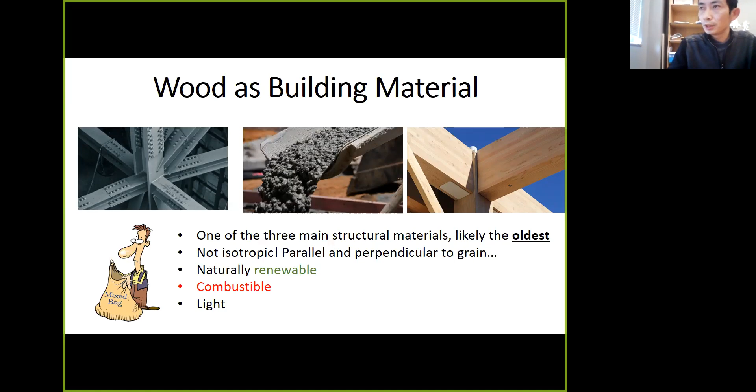As of now, at least in North America and most developed countries, wood is very popular in low-rise and residential applications. If you want to build with wood, there are basically 3 options. One is really old-school, like log cabins. Of course, that's not that old—the really old things you can find in some old civilizations like Chinese and Japanese civilizations.

Then, not quite at the turn of the century but during the middle of the last century—1960s, 1970s-ish—in North America we figured out a way to mass produce, industrialize, and standardize wood products as small 2x4s and wood panels. That gives rise to what we see every day now: stick framing. It's maybe 90% of the residential market here.

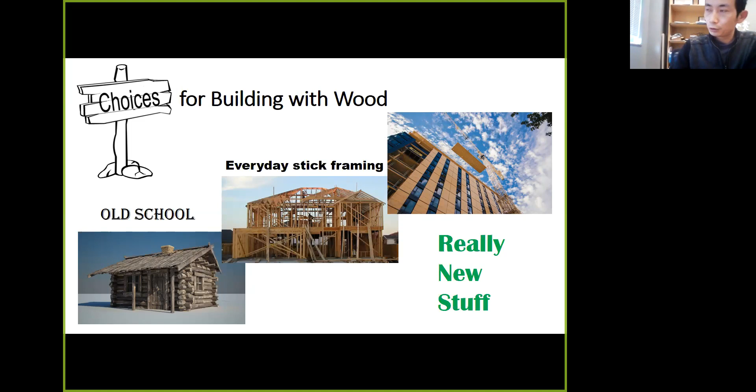And now it's trickling down into North America, including Canada and the United States.

If you start very old, we can actually learn something from it. Some people feel like wood buildings can't last very long, or you have to paint them every year or every couple of years. I know I have to do that for my house, but some of the amazing things about wood design is that wood itself is actually pretty resilient against environmental attack. Like this Japanese temple, it's more than 1,000 years old, and back then there were no chemical preservatives, no paints. I don't think they painted them.

And if you think about tall wood, that's actually not really new. You see this tower, almost 1,000 years old, in China. It's equivalent to an 18-story building nowadays. So that's tall wood, right?

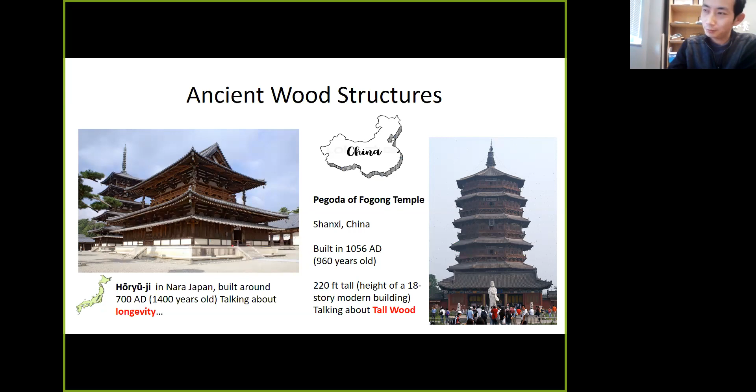But then the question comes naturally: if tall wood and those resilient wood buildings are so great, why don't we do it? I think at least for North America, the US and Canada, everything's driven by the market. Those old magnificent wood buildings were mostly for religious purposes, or they're palaces, like the Forbidden City. Average homes, you don't have resources to build those types of things. So we are thinking...

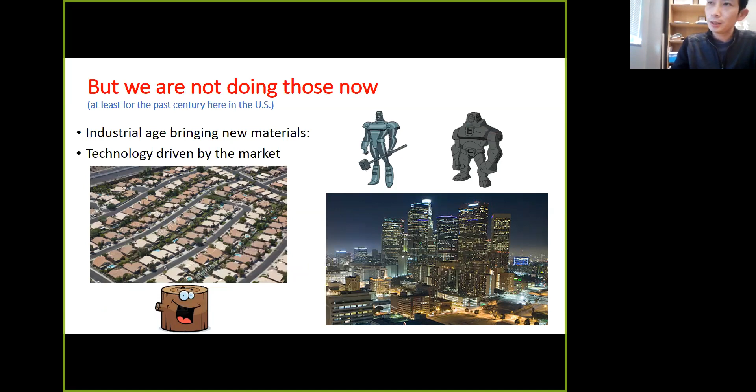At the turn of the century, when industrialization came through, what's the pathway for the wood industry? The wood industry basically said, you know what, we're happy with just handling the residential sector, low rise. We've got a huge market, so we're happy with it. We'll leave the tall buildings in the cities to concrete and steel. That's what they did. So this market drives the technology.

And then we have light frame wood construction, where you can just have some human labor to handle everything. You don't need a crane to do those types of things. Nowadays you probably need some lightweight crane to do the wood trusses, but that's pretty much it, like one day on the job site. The rest of it, you end up using small wood pieces and lumber, and you can handle them with a 5 or 6 person crew, and frame up a single family home, or frame up a residential home up to maybe 5 or 6 stories. That's the current IBC limit.

In current construction of those stick-built or 2x4 homes, you don't really see that much glulam composite lumber. Maybe you see them when you want a really open space and a big span. You maybe use them, but those are just too expensive for single family homes.

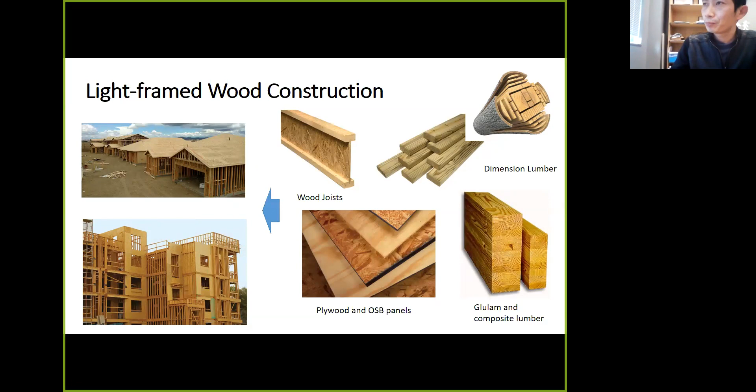The light frame construction has its strengths and weaknesses. One of the most apparent strengths is why nobody can beat light frame wood in the low-rise residential sector: low cost. I think there's a study that shows to frame up a 2-story house, if you take the steel or concrete option, at least in the US, the market price is at least 2 times more expensive than light frame wood. So there's no other option.

It is lightweight, which is good, and we see that during an earthquake, like the Northridge earthquake, wood buildings get damaged, but they don't collapse that easily. It's not a life safety issue, and there's really architectural flexibility. You can frame up a $1 million mansion with wood. You can also do a trailer home with wood.

So it's kind of targeted for the residential market, but there are a lot of shortcomings. The first one, which in my personal opinion is probably one of the most difficult to tackle, is human error. You think about a light frame wood home, you have to literally do it on site and nail in maybe 1 million nails with nail guns, but they miss a lot, and there's no good way to systematically check it.

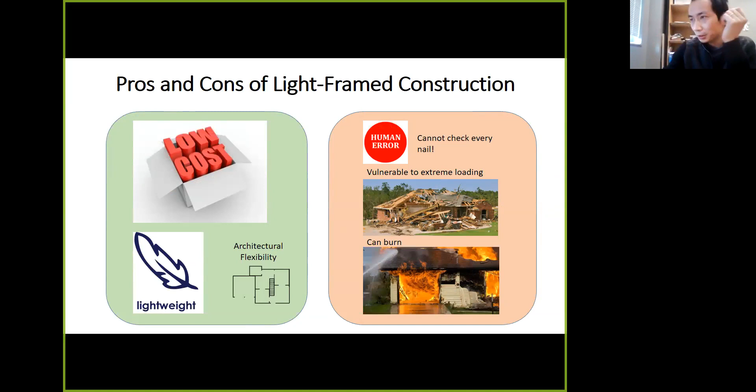And finally, because you have small wood pieces, it can easily burn, and once it burns, it's hard to fight. Because of that, we have limitations in the building code. Per IBC, it is really not economically viable to do type 1 construction using wood. Type 1, for those not familiar, typically means you can build as high as you want. But for light frame wood, it's extremely hard to do because they burn.

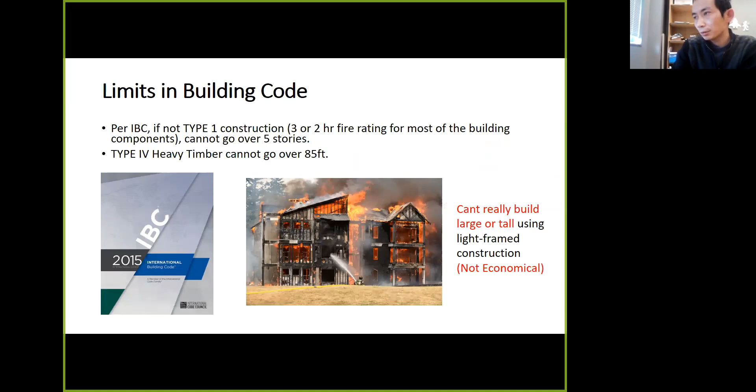Currently, if you say just the wood, how high can it go, it's a Type 4 heavy timber, 85 feet. So because of fire, we're pretty much stuck there. And also, I mentioned it is safe, but it is not really resilient. It's a ton of damage.

Like this house you see, that's actually a picture from the Northridge earthquake. This is a code-compliant design because building code prevents buildings from collapse. It ensures minimal life safety, so you can get out of your home alive. But when you return, if you don't have earthquake insurance, it's gonna break your back.

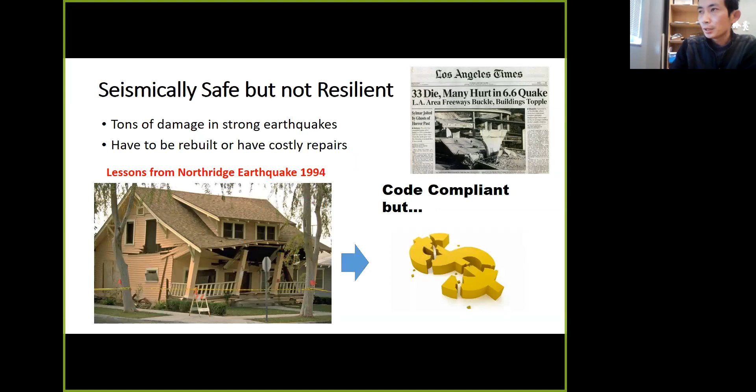So those stick frame buildings started being built in the 70s, up until the 1994 Northridge earthquake. Before that, people just built them. We have a separate building code for wood, called IRC, International Residential Code. It's coming out of ICC, so it's by the same publisher as IBC. Basically, that one is the prescriptive code.

They don't do any calculations on wood buildings. They basically say if you do it this way, then you can build it, it's per code. Then came the Northridge earthquake, and people realized that the performance was not that good.

So the first major systematic project in North American light frame wood is the CUREE Caltech wood frame project. This lasted quite a while and gathered data on existing wood performance. Then we pushed on to using that data to see what's the best we can do.

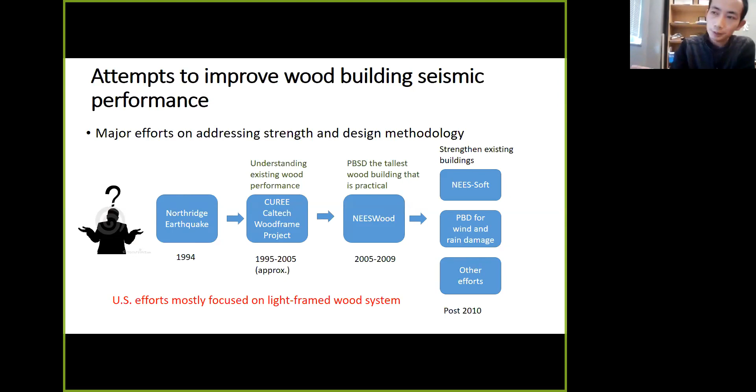If we incorporate performance-based seismic design - that's the NEESWood project, funded by the National Science Foundation from 2005 to 2009. After that, there were a couple of other research projects on light frame stick-built wood, like a study on wind and rain damage due to hurricanes, and some other efforts. But everything up to 2010 is focused on the light frame wood system.

So I'm gonna run through each of them. The CUREE Caltech wood project is a good project, like I said, the first systematic effort. It's almost 20 years ago. If you're new to wood research and want to find the root of why people are doing things on light frame wood the way they do today, that's a good place to start.

It is funded by FEMA and done by a consortium of California universities. Some of the players are very active, like Andre Filiatrault and Kelly Cobeen. People probably know them if you're in wood.

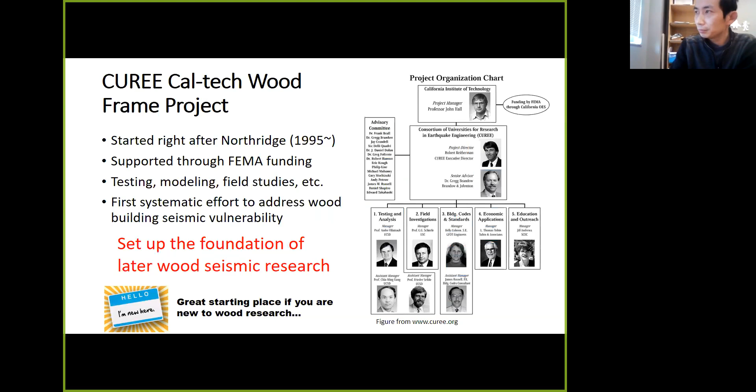The outcome of that is it's the first time people actually systematically tested a wood frame system. They go from connections through assembly - the wood shear wall - all the way through shake table tests for buildings, I think 2-story or 3. I don't remember, but if you check the website out, they have all the reports available. After 20 years, it's still a very interesting read.

There is a simplified numerical model framework that was proposed because, unlike steel and concrete structures where you have clearly defined beams and columns and can do finite elements with beam and column elements, for a wood shear wall there's studs, sheathing, so many nails - how could you do it? So there's a simplified framework proposed primarily by Andre Filiatrault and Bryan Folz in Canada.

So there are 2 computer programs - if you still have DOS, you know, they run on DOS. There's a CASHEW that will let you model a wall using connection data, and SAWS using wall data to model a building. They also found out the non-structural finishing material really matters - it actually contributes about 30 to 40% of stiffness and strength in a wood building, among other things.

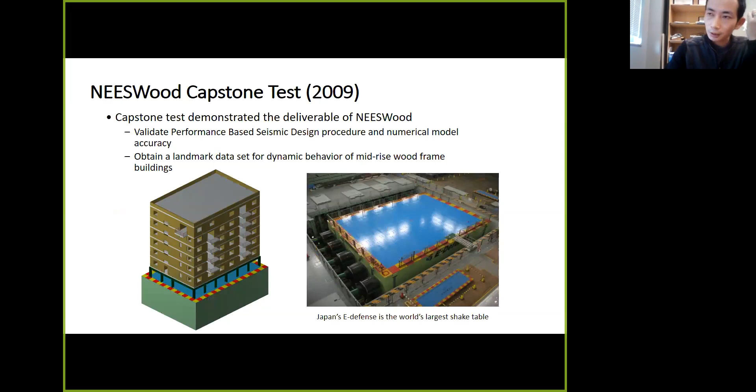This is the test structure. Up to this point, it's still the largest building ever tested on a shake table. That's apparent because the Japanese shake table is the world's largest, and they haven't tested anything bigger than this yet. The design was done through DDD, which is direct displacement design.

The first story steel moment frame has bracing in it. The bracings are there because we need to use that steel moment frame as a 3D truss to lift the building, as I'll show you later. But during the test, those braces are loosened so they don't engage.

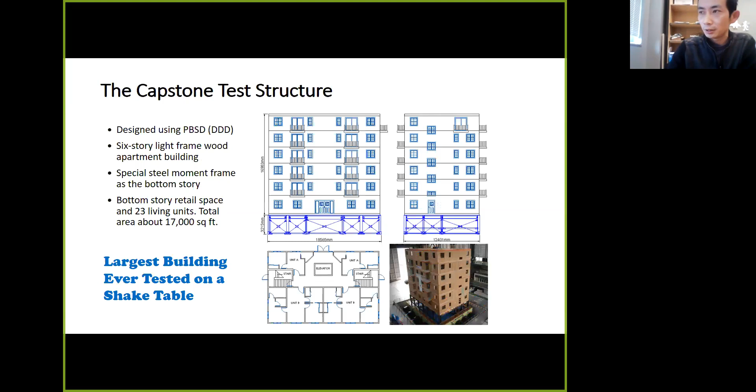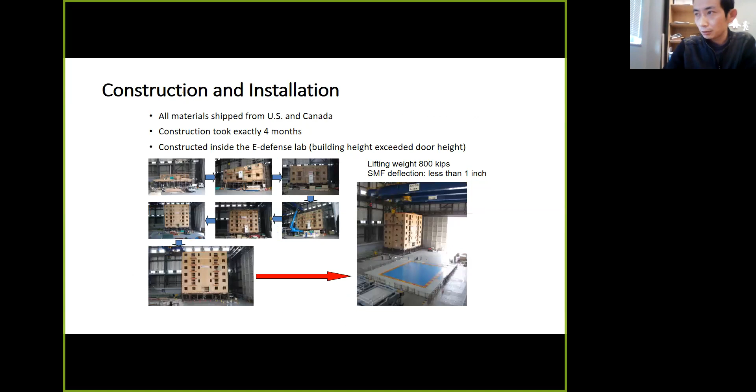Construction of the building takes about 4 months, and we don't have enough funding to occupy the table for 4 months. So the way to do it is to build it in the corner of the lab, and after it's all done, use 2 overhead cranes to lift the entire building and put it onto the table.

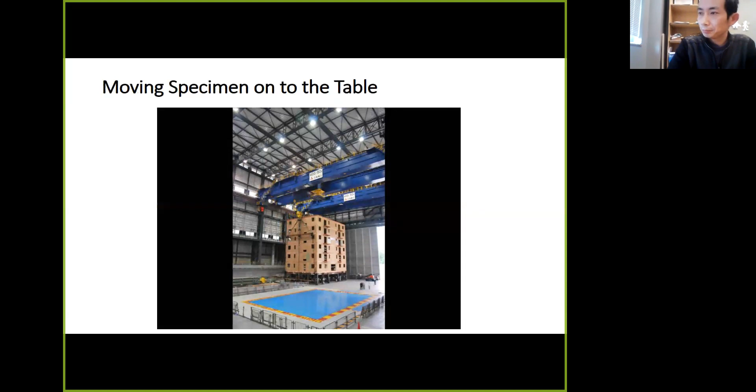Here's the moving footage, time lapse. If you've been following wood frame research, I'll be surprised if you haven't seen this one, but it's still quite a thing. You can see the people actually standing on the side to balance the building.

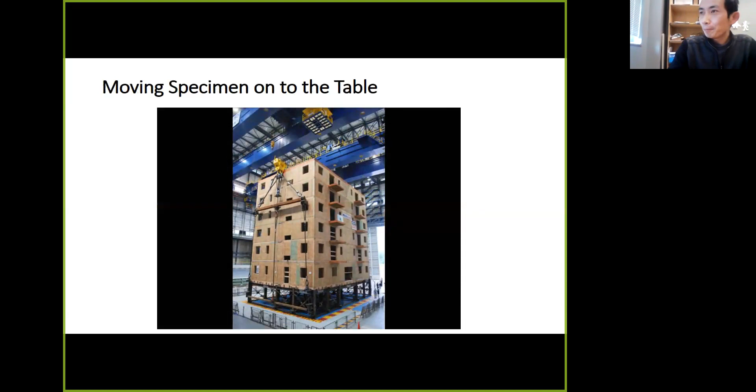After the building was put on the table, they added instrumentation. There's specific instrumentation they use at E-Defense because it's an indoor facility where they can do optical tracking. You see all the red LED lights, and they have high-speed cameras to track the movement. This turned out to be a pretty good tool for seismic research and understanding how the building moves.

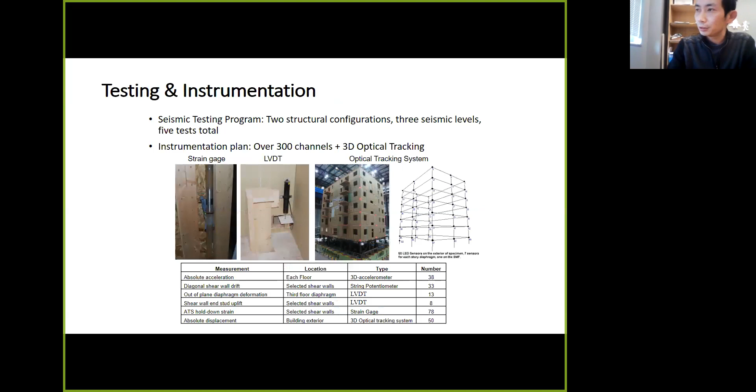This is, I believe, the last test we did back in 2009. It's 180% of the original Northridge earthquake recording from the Canoga Park station. The Japanese table is a 3D table, so you see the vertical motion came first. That room shown there is the room on the corner, with the lights on.

This inside shot is from the top of the story. You don't expect too much damage, but you probably expect a lot of acceleration, as you can see. The heavily damaged stories are lower, actually the second and third story, but it's not like the damage you'd see in Northridge. It's just some cracking of the drywall over the window openings, which can be easily repaired.

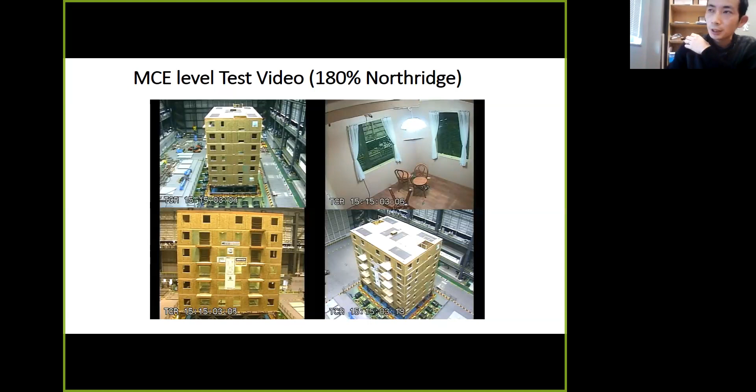The optical tracking really tells us that if you design the 6-story building correctly, even in a larger earthquake—I think that one's probably magnitude 7+—you shouldn't see any significant weak stories. The entire building moves almost like jello, and this measurement is magnified by 20 times.

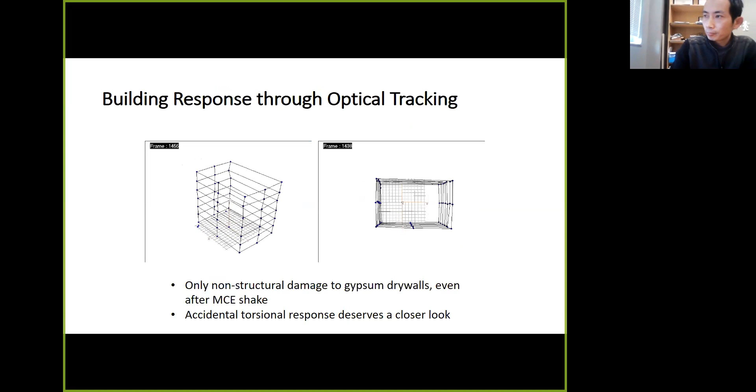We also make other measurements. For a multi-story wood building, because of the strong overturning, you need tie-down rods going from the top to the bottom of your stacked wood shear wall. We measure the tie-down forces and plot them in sync with the building movement. You can see the entire building behaves similar to a cantilevered beam out of the ground, with those tie-down rods serving as tension fibers.

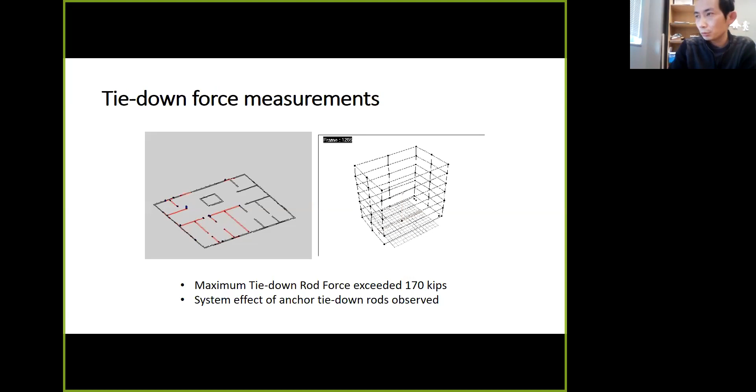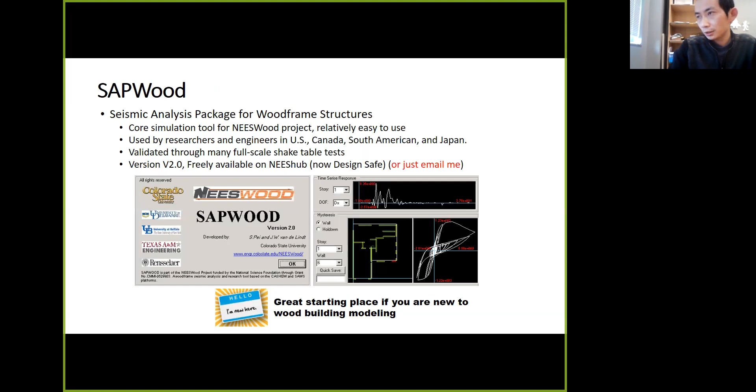Another outcome of the NEESWood project is SAPWood, an upgraded software package for doing nonlinear time history analysis of wood buildings. It's still based on the original source framework from the CUREE project, but now we have a nice interface. We can do IDA and automatically run multi-record IDA, so everything becomes very easy to use. If you're interested in doing wood analysis, this is a good entry point because it has a nice user menu, and you can email me if you have questions.

The outcome of the NEESWood project: you have solid proof that high performance mid-rise wood building is viable through PBSD and light frame wood systems. Then direct displacement design becomes kind of a standard or popular approach for wood design PBSD. And we have a new tool that has been validated through numerous large-scale shake table tests.

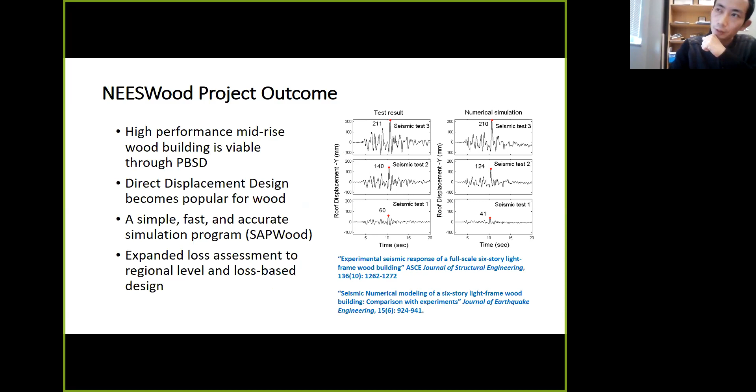So you can feel a little bit confident using that tool. Then after that, you would think, okay, you already built the tallest building allowable by IBC, and it performs pretty good. Then what else can you do? Oh, it turns out you can focus more.

That's new construction, but you can actually focus your research on existing problems in existing buildings. You see in the photo, I think that's from the Loma Prieta earthquake. It's the problem of a soft story building, like in California, especially in the Bay Area. People like to have their tuck-in garages on the first story, intentionally—or maybe not intentionally—creating a weak soft story mechanism. So your upper story can be intact, but your entire building collapses.

And those are existing buildings, so not much you can do about them except retrofit. So the NEES-Soft project is designed to find a methodology to retrofit them and test some real options, led by the folks over there. There's a lot of development going into NEES-Soft. But again, I'm presenting the final results, which is shake table validation at UCSD's outdoor shake table. They did the construction, then they tested, I believe, 4 options.

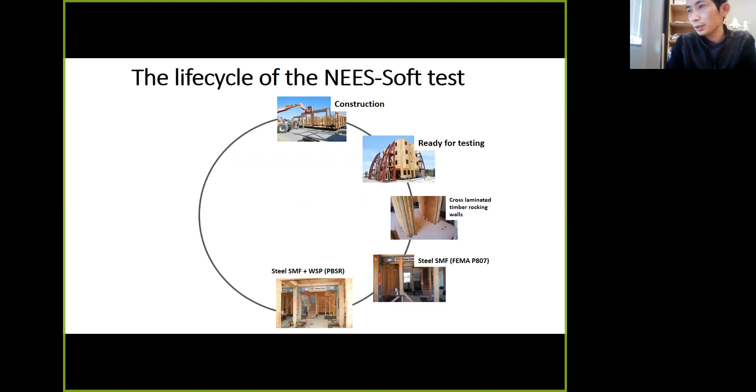One is a cross-laminated timber rocking wall, which we're going to talk about later. Another is steel moment frame, then steel moment frame plus wood shear wall, and then dampers. After they did all those tests and validated their results, they removed all the retrofits. Then they did a collapse test to collapse the building.

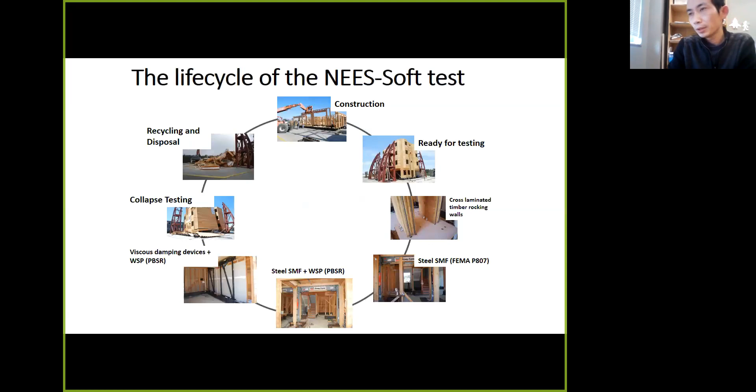So this is a collapse test, and I want to make it clear that this is the intentional collapse of the building after all the retrofits were tested and removed. Because, like, one day it's kind of crazy—I look at a YouTube video, and they use this test to say, oh, wood is not safe. Then they show another video of a steel and concrete building and say, oh yeah, you see, wood is not safe. But it's not—this is the intentional collapse.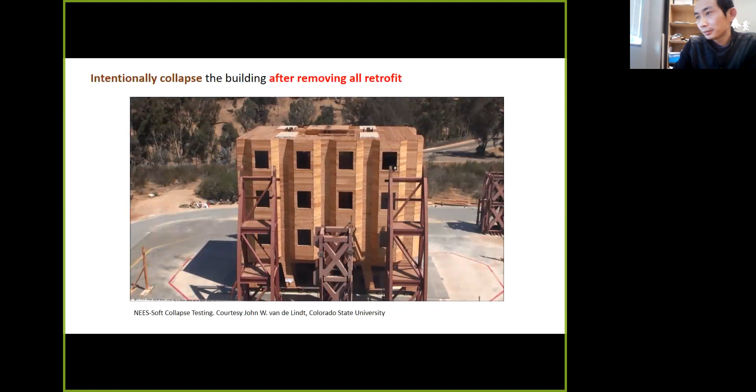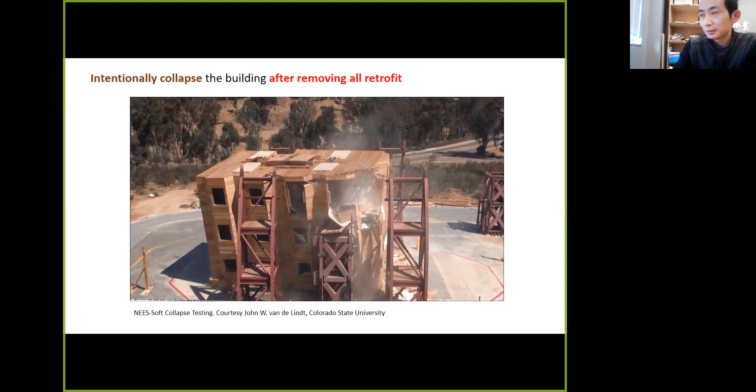Yeah, well, that's probably something a student can hold on to, laughing.

So the NEESWood—this soft story project—yeah, I keep saying NEESWood because I'm involved in that a bit more. But this soft project's outcome developed a better understanding of the behavior, from how it caused the soft story all the way to collapse. Then it experimentally validated some of the design philosophies, including an early design philosophy, FEMA P-807, and also the new one: a performance-based seismic retrofit approach proposed by the NEESWood team.

Some practical options were provided, and then there's a new model developed by Dr. Weichiang Pang at Clemson, called Timber 3D. I believe it runs on MATLAB, and if you're interested you can contact him directly. This model is more involved than SAP. Basically everything is 12-degree freedom, and you need to do a lot of things. But the real catch here is to try to capture collapse—I think he did a pretty decent job there.

Then, following that project, some of the techniques were applied in real-life retrofits in San Francisco City. They have a mandate on the retrofit.

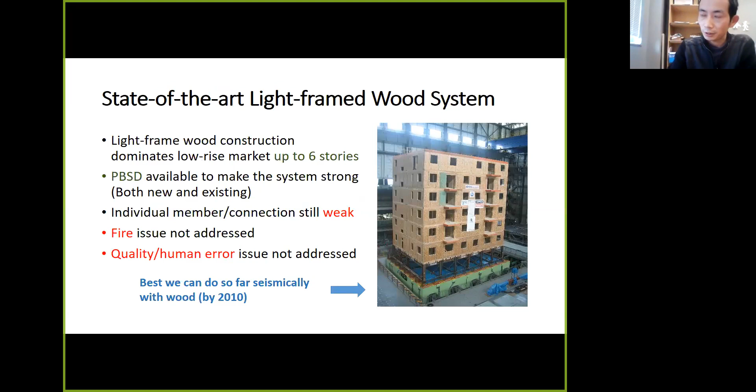So we need to think of something new. The simple idea is, how about we use a lot of wood, just solid wood? In fact, the Germans and Austrians thought of this first. They said, why don't we just start producing glue-lam panels? We use small members and glue them together to create panels, then build buildings out of it.

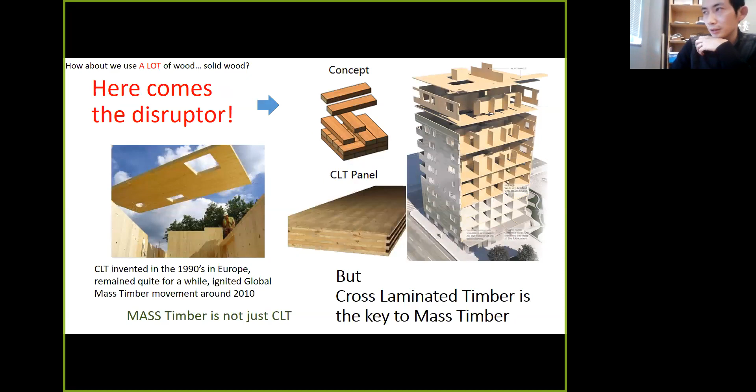There's a misconception that a tall building has to be all CLT. In fact, we don't call it a CLT building, we call it a mass timber building, which is a combination of CLT and big glue-lam column and beam members. But in this example, that's a London building completed a couple years ago, that one is all CLT panels.

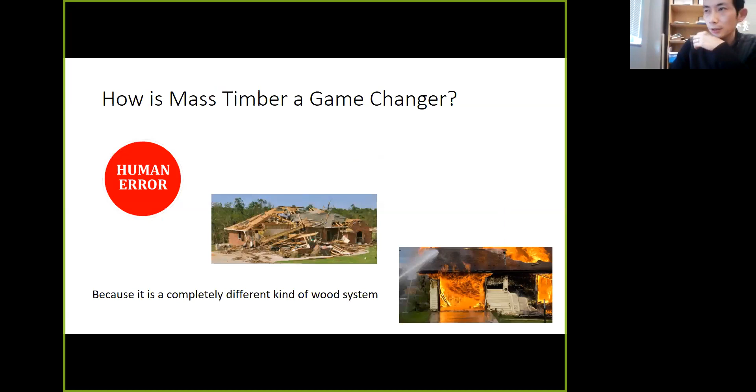So how does this mass timber or CLT become a game changer? Because it addresses three limitations of light-frame wood. The first is human error. Every single panel, if you buy them, has to be produced in a factory. If you have detailed designs, they'll cut it with CNC machines in the factory, wrap it up, and put it on site.

Then all you need to do is install them, not with a million small nails, but with specially designed connectors that are easy to inspect. Like you see in the construction process here, it's easy to detect if workers install those brackets incorrectly. An inspector can just walk in one story every day and get it done.

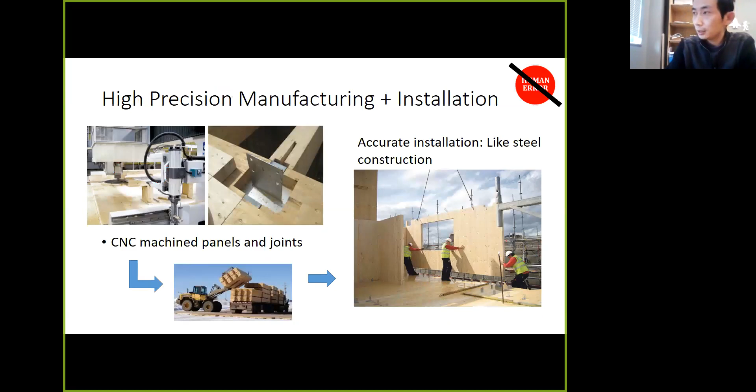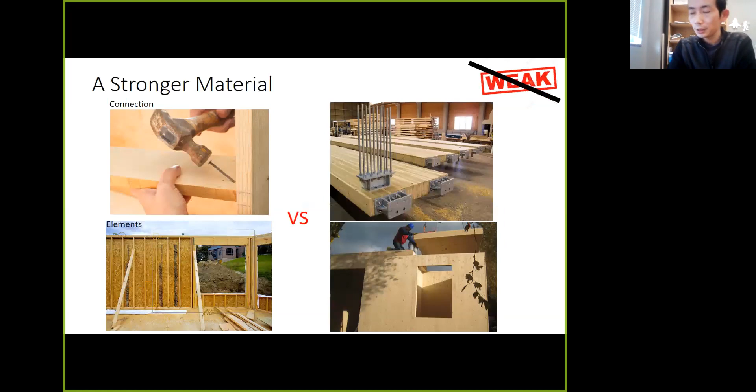It is a stronger material if you think about the connections on the right. Not all CLT connections have to be as bulky as that, but at least you have the option. In fact, we just did some testing of CLT rocking walls, and the steel will yield before you can damage the wood.

Then finally, the fire resistance. For wood, counterintuitively, it is actually the best structural material under high temperature, because the steel and rebars within concrete have their properties change under high temperature.

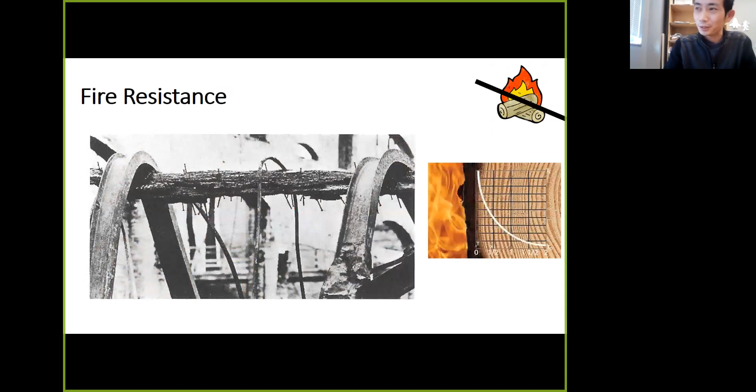This is a photo from the 1906 San Francisco earthquake, where fire after the earthquake burned down a building. It's an enclosed fire situation, so the temperature inside gets really high. You can see the steel beam melted, but they were supported by a timber beam from 1906. There was no special treatment for that beam, it just survived because of the volume.

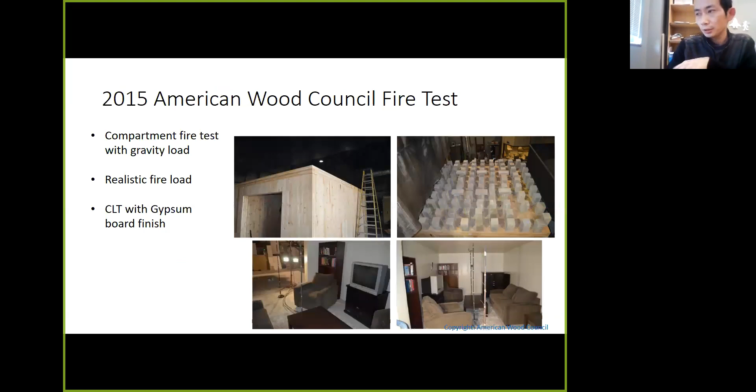Now back to 2015, AWC, the American Wood Council, did a fire test of a CLT compartment. This is called a burnout test, considering the worst situation where your sprinkler fails and fire fighters can't get in because of an earthquake, so the fire has to burn everything inside the unit and then self-extinguish. They let it burn with a whole bunch of furniture, probably more than you'd typically put in such a tight space.

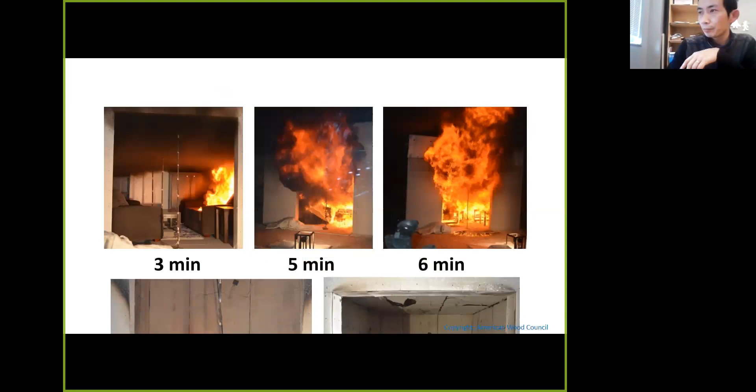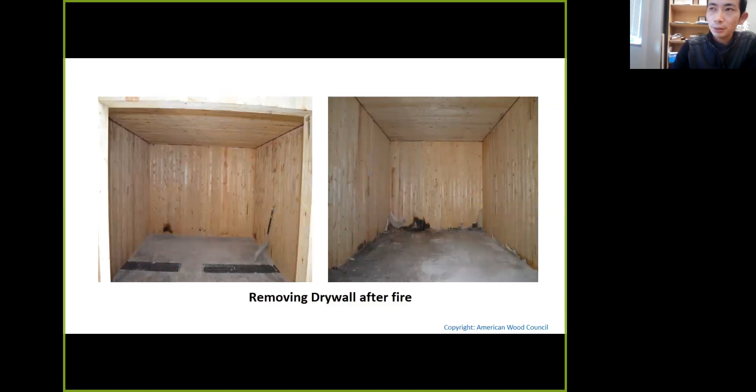After an hour, everything burned down, there's no couches, no TV. Then they removed the debris and the drywall. The wood is pretty much intact. You could say that's just because of the drywall, true, but imagine the temperature inside from burning for an hour. If you had another type of floor diaphragm or floor beam system, you'd probably have some permanent deformation afterward, but not with wood.

If you combine all these factors, it's actually a new way to build a tall building in almost 100 years. The first metal building over 10 stories went up in Chicago in 1884, more than 100 years ago. The first reinforced concrete building is in Cincinnati, 1903. After 100 years, you could only build 10-story-plus buildings with those two materials.

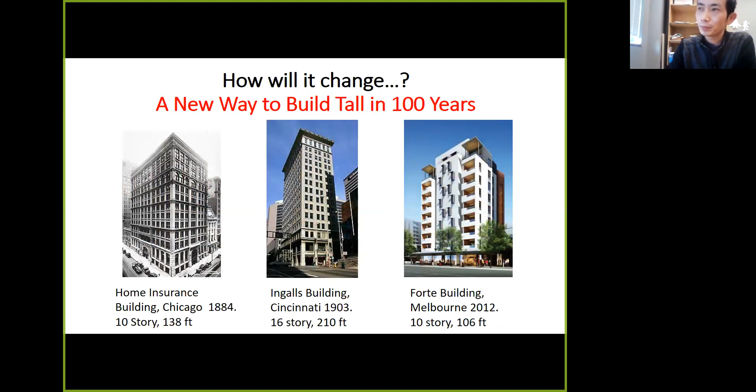Finally, in 2012 in Melbourne, Australia, they did a 10-story building with CLT. But you might say, okay, hold on, that's all good, but do we have enough trees for it? Are you going to cut down all the trees to build your buildings?

There's something called sustainable forest management. If you just have a forest and chop it down without doing anything, it'll be bad. But those are pictures from New Zealand, if you farm forests just like you farm a crop, it's a longer cycle, maybe 15 to 20 years, but they've successfully done that in New Zealand. For a country without that much land, timber export is one of their major economic drivers.

Even Japan exports timber to China. I remember when we were in New Zealand for a World Conference on Timber Engineering, one of their very high government officials came just because of how important this forestry is to them. So it can be done. An analogy I always want to make is chickens, you have to think about wood as a renewable resource, which it is.

It can grow again, so it's like chicken. If you eat more chicken, the chicken population will grow. If you use more wood in a sustainable way, we're probably going to have more forest. If you make it a prime material to use everywhere and people can make money out of it, they'll probably invest to try to turn Nevada into forest.

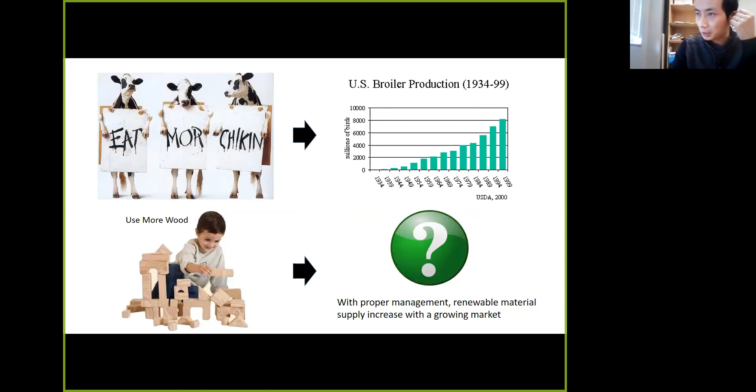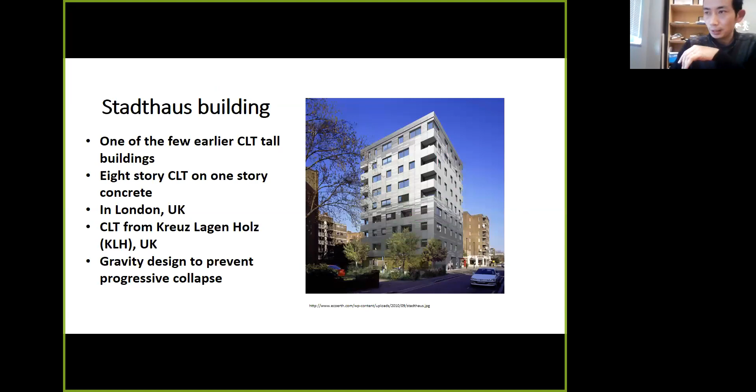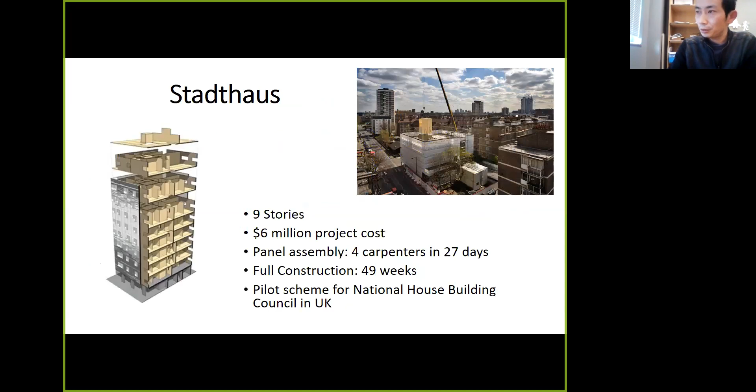Some of the existing wood buildings - this one, the one I showed you earlier, is in London. What's amazing is it takes 4 carpenters 27 days to complete the structural framing. Of course, to finish the whole building takes close to a year, but the framing itself, if you compare that with light frame construction, is not imaginable. It's four people, and that includes a crane operator.

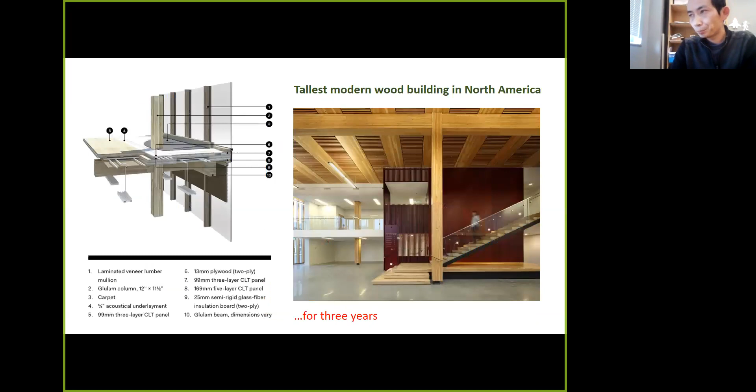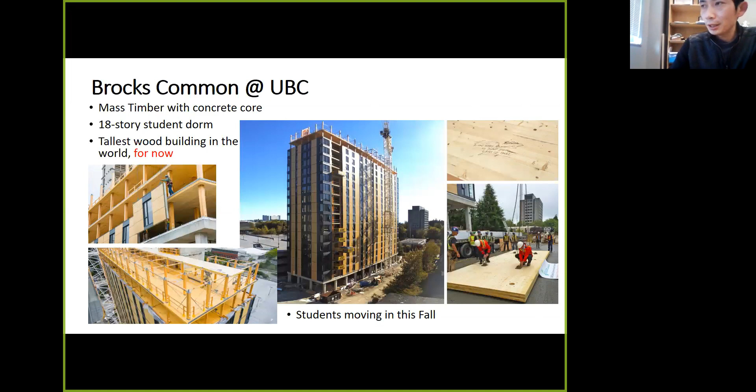Then you have the current world record holder in height - it's Brock Commons student dorm at UBC, 18 stories. But this one actually uses the concrete elevator core as the lateral system, because right now there's no code-accepted lateral wood solution for CLT. But this is just because the code cycle is so slow. If you really want to do it, you can do it through special permission.

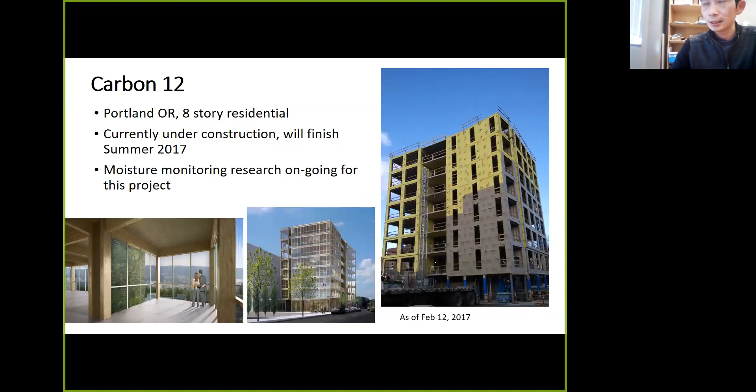Carbon 12 in Portland is a residential building - I think they're starting to sell it now. For this one, the lateral system is a braced steel frame. So my opinion is that if you want to do a mass timber tall wood building now, it's actually not a bad idea to use some existing code-approved lateral system with steel and concrete.

The Framework project is really the first one that aspires to use only wood. This one used the post-tension rocking wall system, but they actually went through a lot of paperwork and testing to convince the building officials that it is viable.

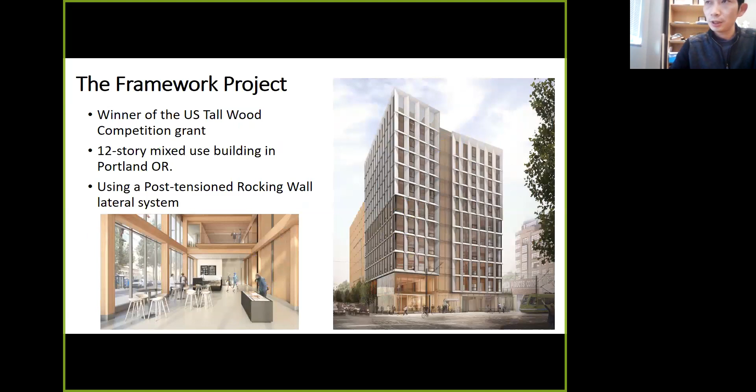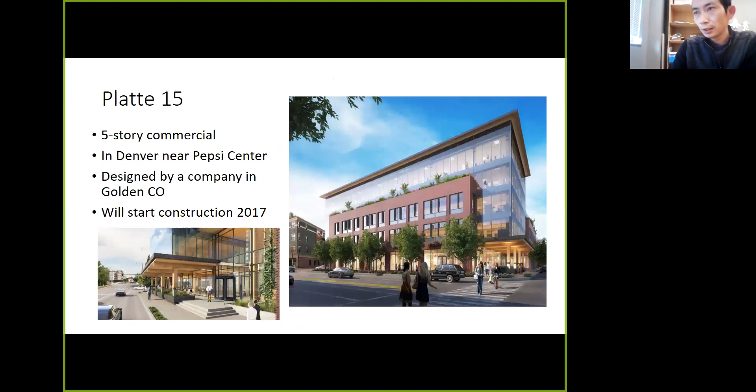Then there's some - you don't always have to build over 10 stories. Here in my neck of the woods in Denver, they're doing a 5-story commercial building. The investor likes it because he just likes wood buildings. There's more to come in different sizes and shapes - you've probably seen them in the news before.

I know them, but now let's get back to seismic. This new heavy timber, mass timber, whatever you call it, is great - it has potential because it handles the fire situation. What have people done with it on seismic?

After it was invented, in Europe people started doing testing - like small shake table tests on walls in Macedonia and Slovenia. Then in Italy, which is probably the only European country that really cares about earthquakes, they did a project in Japan and tested a 7-story tower. Then in Canada they're doing some testing, and in the US too, even in Japan.

I was just going back from Tokyo two weeks ago - they are testing CLT platform construction in Japan, trying to sell houses, but those are all what we call platform construction. Platform construction is where the wall is stopped by the diaphragm - so you do a wall, then put a diaphragm on, that becomes a platform, then you do another wall. That's the traditional way to do it.

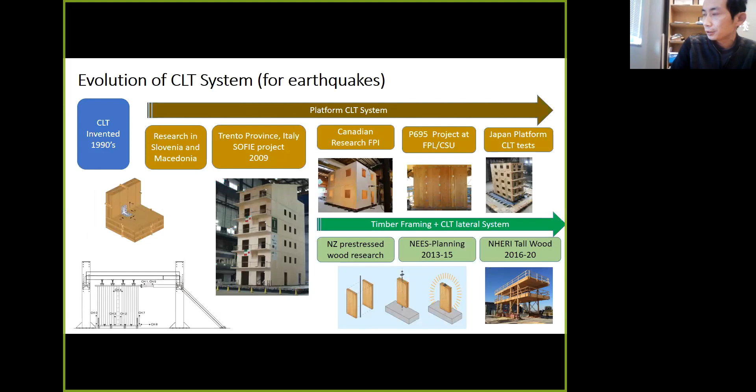But there are new ways if you want to see less damage in earthquakes, because the platform system, as revealed by Japanese and Italian tests, tends to have pretty hard-to-fix damage at the corners because of overturning. But in New Zealand, people started thinking about combining pre-stressing with mass timber, and we picked up that idea to apply to tall wood - we actually started doing that. I'll talk about that.

But before we do that, the basics for engineers: what matters is the code. If you don't get your design approved by the code, it doesn't really mean anything.

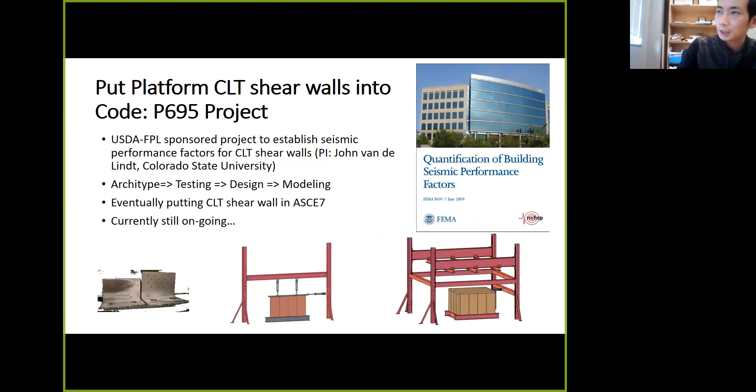So there's an effort to actually put CLT shear walls into the code, through the FEMA P695 project. If you don't know what that is, basically if you want to go into that table, R factor in ASCE7, you need to go through this for any new system. This project is led by John van de Lindt at Colorado State University. It's funded by USDA. It's still going on, but I think they're almost there. I think you will probably see an R factor for CLT shear wall later this year or 2018.

Then back to the resilient part. Now it's NSF, right? So TallWood is NHERI. That's actually an opportunity to do it right for the first time, because we don't want to run into the old problem with light frame wood construction. Right now, after all the existing buildings are built, we find out we have a soft story.

We don't want to do that, so we want to really do something above code, which is resilient. But we need to do some preparation work. First, we need to figure out if everybody really wants this, to build consensus. Secondly, we need to test some components that can actually get us there. So that's the purpose of the NEES planning project. If you remember, between NEES and NHERI, there's a 1-year period where they give a planning grant. This is one of them.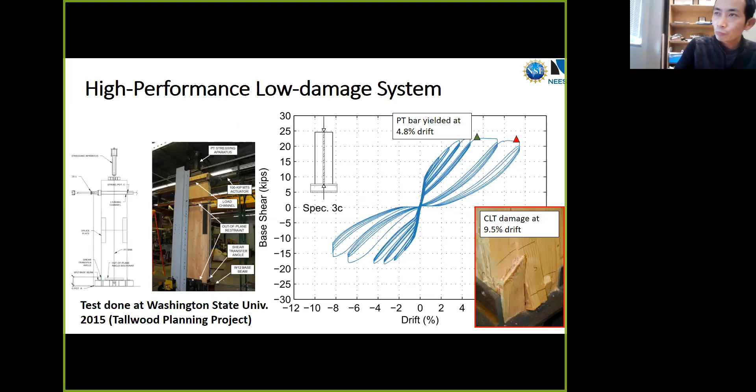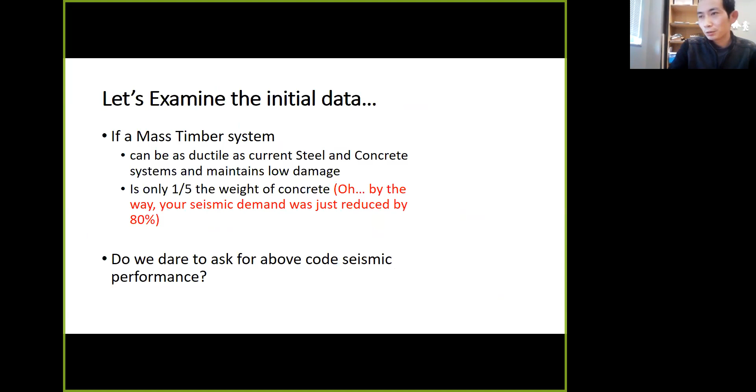So if you examine the initial data provided by this planning grant, we have a mass timber system that can be as ductile as current steel and concrete systems and maintains low damage. And it's only 1/5 the weight of concrete—you can reduce your seismic demand by almost 80%, just for the structural part. So do we dare to ask for above-code seismic performance? Yeah, sure, and we should do it.

So we used this argument to write another proposal to NSF. Then in 2016 we got funded to do the NHERI TallWood project, which Jim mentioned earlier—a 6-university collaboration with a lot of industry buy-in and international collaboration. Like Andy Buchanan, the godfather of timber research in New Zealand, and Marjan Popovski representing the Canadian side. There's a website you can check, but the game plan is basically this.

First, we're going to work with architects to figure out, if you're going to do TallWood buildings, what kind of floor plan can sell. It doesn't really make sense for us to come up with some floor plan behind closed doors and then have investors not want to invest in it. So we collaborated with LEVER Architecture, and they are providing archetype designs, which we're going to review later today.

Then we do investigative testing at the system level, including 2 tests. One is at UCSD—a 2-story conceptual test with CLT diaphragms and rocking walls, a full-scale shake table test we just completed. Then coming next year, we're doing component assembly tests at Lehigh, which I'll talk about a bit later, to load those walls in biaxial motion and also incorporate nonstructural systems. After we gather the data from those investigative tests, we're going to do R&D and finally come up with a 10-story design concept, then build and test it, validating our results in 2020.

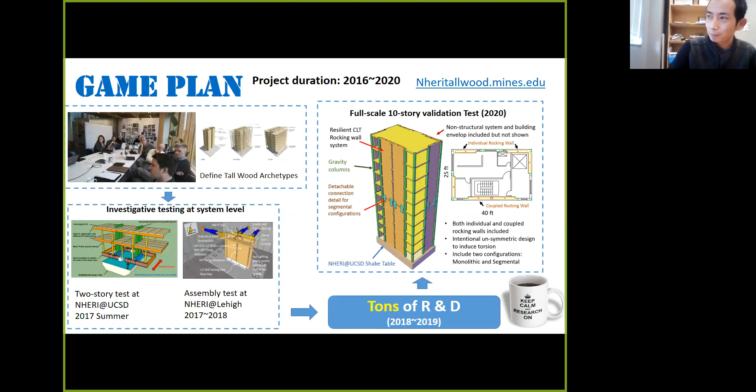Like I mentioned, the full-scale two-story test was just done in San Diego. I'm going to show you footage here. It's a Northridge earthquake times 2—basically, to show how resilient it is, we ran the Northridge earthquake one after another without stopping.

So that's the first Northridge earthquake. And the second one.

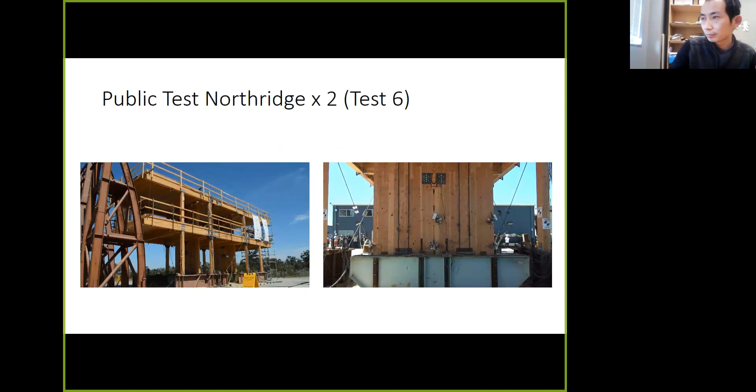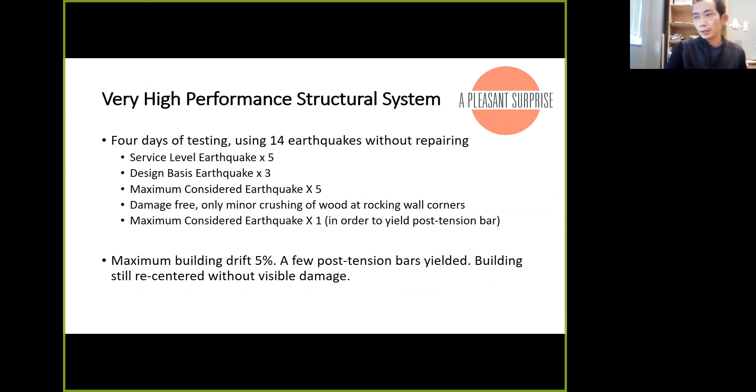So after that, we actually did a total of 14 earthquakes. There's like 5 MCE level, one that's actually exceeding MCE. We reached the maximum building drift of 5%, but there's not that much damage. After that, we actually take out the wall and look at the toe. That's the damage you see, and there's some chipping, but the gravity frame and everything remains damage free. We did yield a few post-tension bars. We know that thanks to the load cells provided by Lehigh Lab.

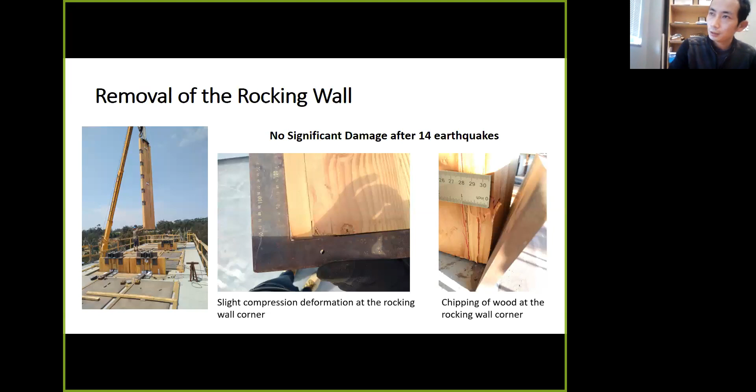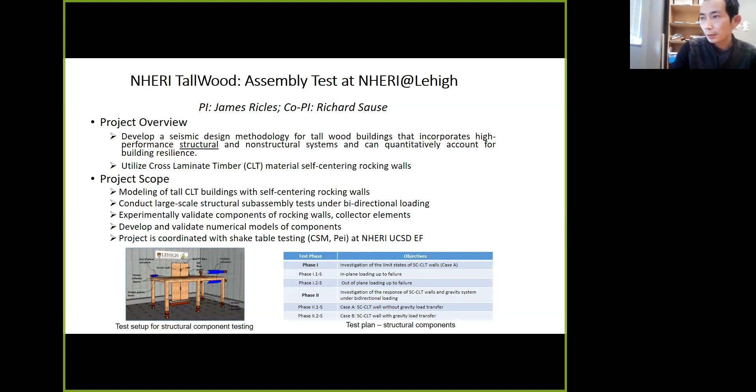And then, that's it. Moving forward, next year, early next year, we're gonna do at Lehigh a biaxial loading test to study in closer detail the rocking wall behavior under biaxial loading, and also the joint connections, because the UCSD table, nice as it is, is a 1D table. That's what we're gonna do next year early.

Then the second phase of the Lehigh test, we're gonna actually include the non-structural components, because if you're talking about design for resiliency and downtime, non-structural components, the damage to those is actually a driving factor. So we want to try some new designs that will remain damage-free or very quickly repairable after large lateral drifts. This was led by Keri Ryan from University of Nevada, Reno.

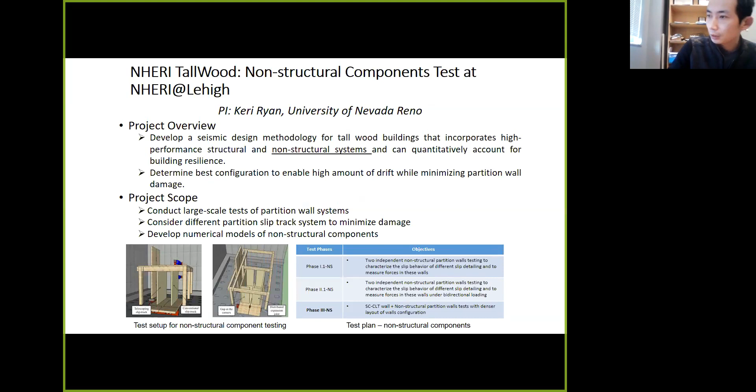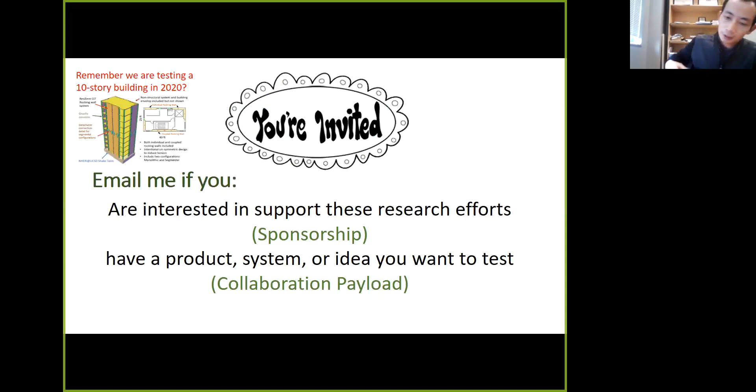And don't forget, we're doing a 10-story building in 2020. I don't know if you're industry or a researcher. If you're a researcher and want to do a payload test or invest in some system, or non-structural even, email me and talk to Joy, and try to throw a proposal in maybe next year. And if you're industry and want to test some of your items in the 10-story building, this is like a once in a lifetime opportunity to do that, to really show your customers that your product will survive.

So the conclusions - I mean, because this is the overview, I don't really have any specific conclusions. The first one: you can use wood to build buildings. You say, okay, well, that's inspiring. But I mean tall ones, over 10 stories. The wood building has the potential to be very resilient against large multiple hazards.

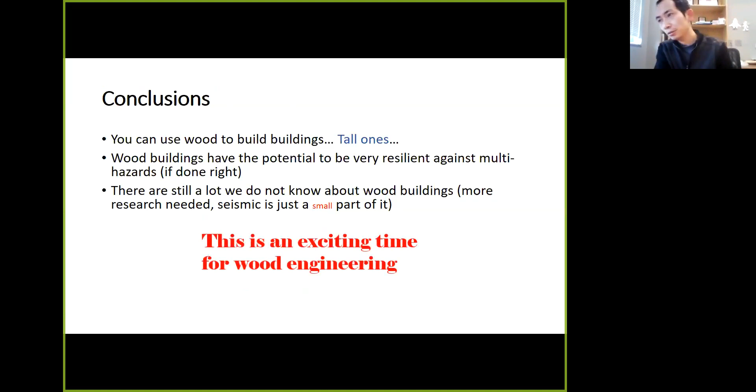We're just talking about seismic here, but in fact, thinking about wind and CLT, you can do a lot of things here, but it has to be done right. And there are still a lot we don't know about wood buildings, especially tall wood buildings - totally a new animal. More research is needed. Seismic, what I covered here, is just a small part of it. So to conclude, this is really a very exciting time for wood engineering. And you may ask what will happen next.

Yep, I think that's actually part of why I was in this profession at first. I mean, doing research is to explore for what you don't know.

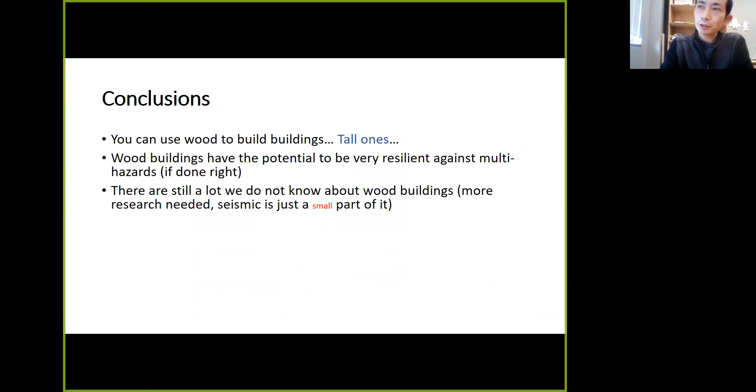So I would say realistically, for a wood building versus a concrete building, your weight reduction is probably close to maybe 30%. I mean, it's not gonna be 80. But it depends on what kind of system you use. If you're using an open floor plan system like what we tested, the reduction will be less. But if you're going for the London building and the Forté building in Melbourne, which is all CLT panels, your reduction will be more because platform CLT is actually very, very stiff.

Yeah, I think you make a great point. It's probably should not be 80%. That's just a simple comparison of the density of the material. Yeah. Okay. Thanks.